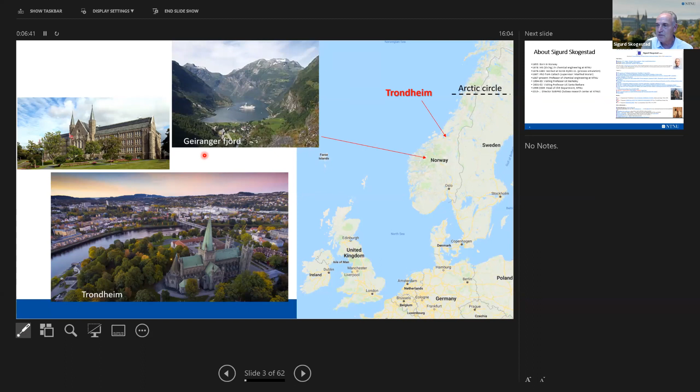Just a bit about myself. I mentioned I got my PhD in the US with Manfred Morari, early to mid 80s. Before that, I worked a bit in industry, but since then I've been in academia here in Trondheim at the university, NTNU. You can find more information about me on my homepage if you check it out - it's this old-fashioned homepage from the 1990s.

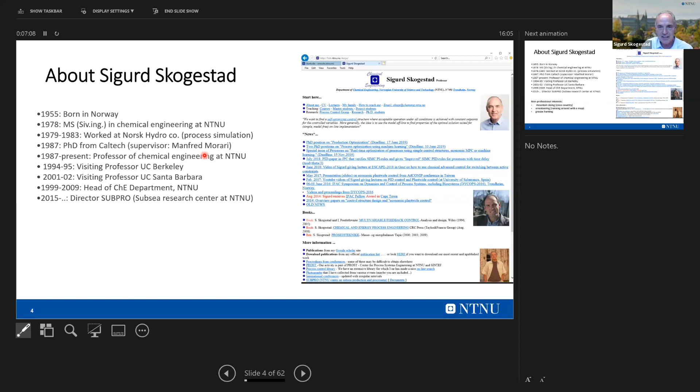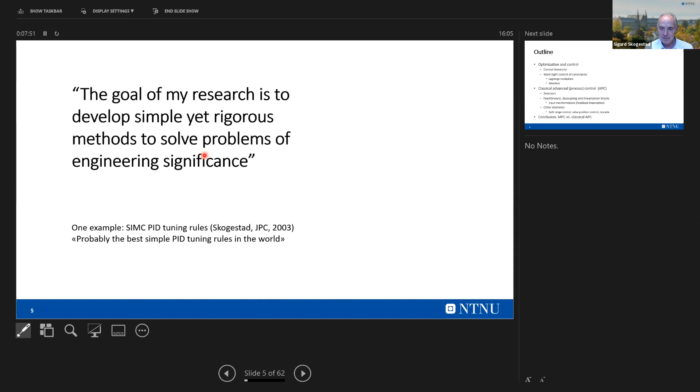My interest in terms of research is really to find things or develop tools that can help engineers do their job better. So that's always been my interest - I want to make something that's rigorous, but also useful. One example is the PID tuning rules I published back in 2003, which I called 'probably the best simple PID tuning rules in the world.' Actually I tried to give the paper this title, but it was not accepted by the journal, so anyway, this is like a subtitle. That's one example of something I liked working on.

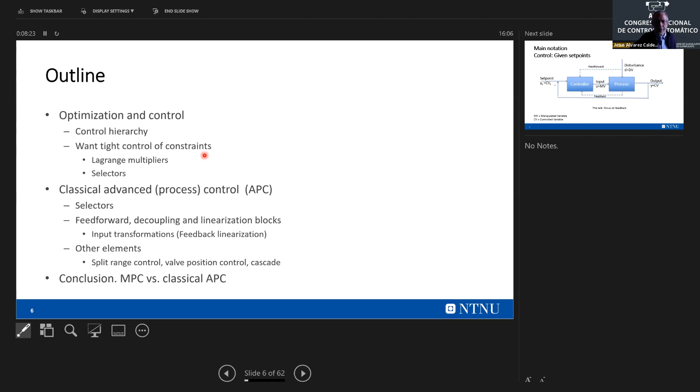But today I will talk more about optimization and how that links to control. I will start by talking a bit about how we do control hierarchies, and then I will talk in more detail about classical advanced process control using selectors, input transformations, split range control, and things like this. At the end, I will discuss a bit of MPC versus classical advanced process control.

This slide is just to give you some of the notation. When I talk about control, we're talking about the problem where you have a given set point. In optimization, you just have a cost function to minimize, which could be economic. But in control, the cost function is related to keeping the controlled variable, CV, the output Y, close to a given set point or reference. And for this, you use the inputs, the manipulated variables.

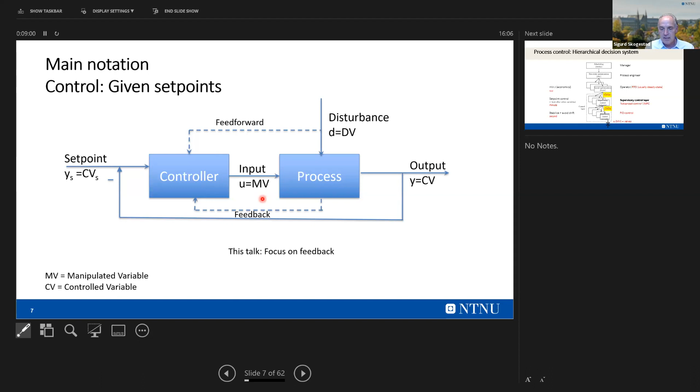But if you look at how a real system is controlled, it's not in a simple fashion like this. This shows a typical control hierarchy in a chemical plant. Here you can see 5 different layers, and each layer is also subdivided into different boxes representing different parts of the system. The main basis for this division is timescale separation. At the bottom you have the stabilizing layer, above that the advanced control layer on a minute basis, and then economics typically on an hourly basis. This is usually steady state in chemical plants. So this shows you how the real system looks with the different decision layers.

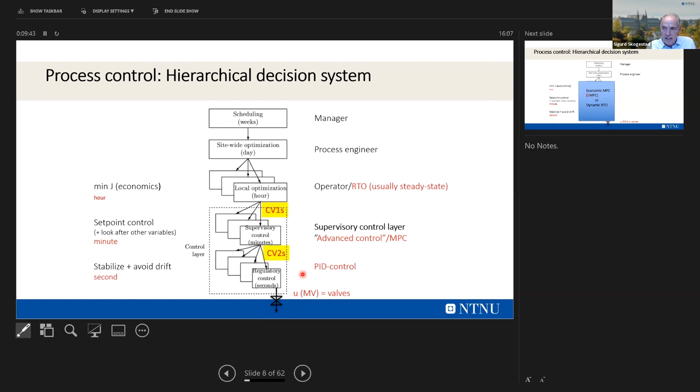Now, if you look at how people in academia are working, they're trying to replace all of these layers at the bottom, the two control layers, and optimization, by what is now popular to call economic MPC. The E stands for economic. In this talk, I will be talking about MPC, but that's going to be the normal MPC just on set points. This economic MPC is of course going to be the optimal way of doing things. The problem is that it's very difficult to make it work in practice on a big problem because it needs models and tuning and so on.

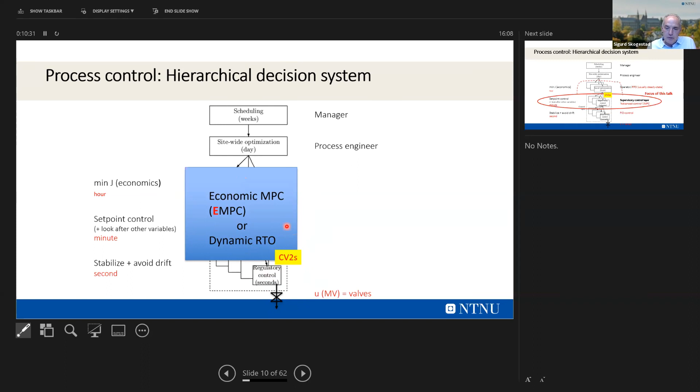You can try to keep some of the control layer at the bottom and replace just the economic layer and the supervisor layer by this. But also this is difficult to do in practice, at least for a large problem. So for large real systems, we are back to this hierarchy that I showed. The focus of this talk will be on using this hierarchy, and especially on this upper control layer. So that's going to be the focus in the talk, and talking a little about how it links to the optimization.

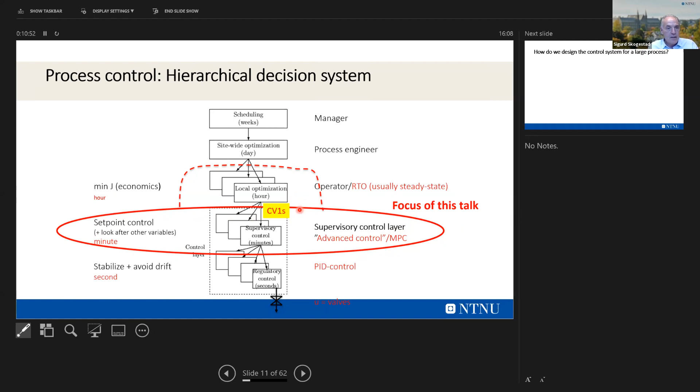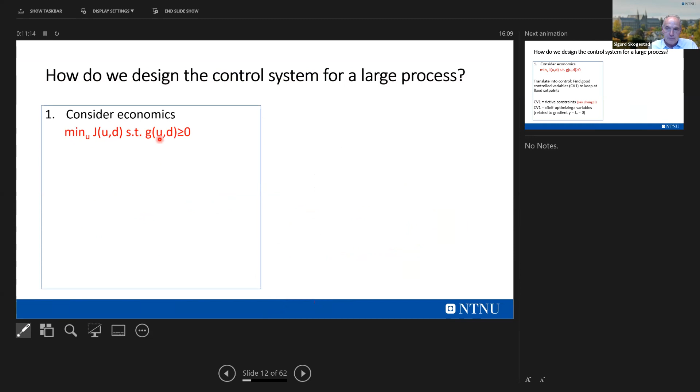So how do we design the control system for such a large process? There's many ways of doing it, but the way I recommend is first to consider the economics. You look at the optimal way of operating the system, usually just from a steady state, by minimizing a cost subject to constraints. Then you want to translate it into control, finding good control variables to keep at constant set points. The first thing you should always control is the active constraints. For the remaining degrees of freedom, you want to control something related to the cost gradient, which I also call self-optimizing variables.

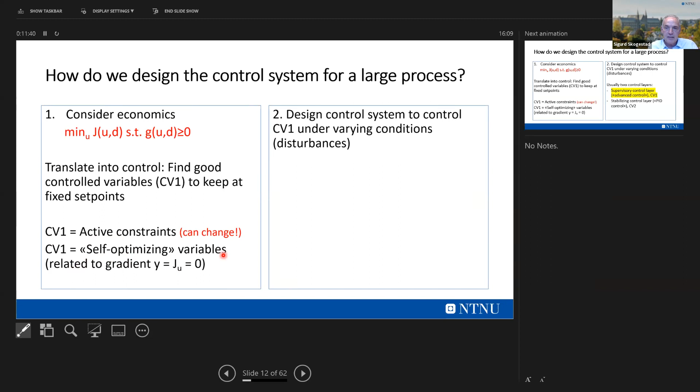Now, when you have selected these, then you need to design a control system to do this. That will then usually consist of two layers: one is this supervisory control, or advanced control layer, and then below there's this stabilizing layer. So in this talk, I'm focusing on this advanced control layer.

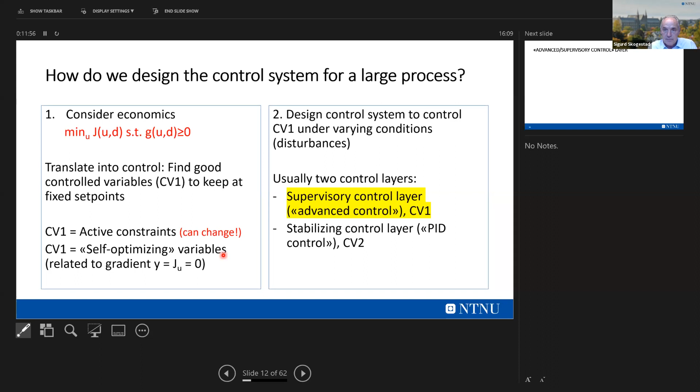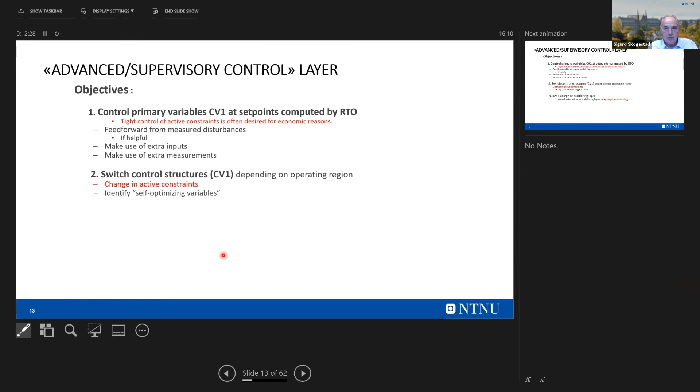So what are the objectives of this upper control layer? There are 3 main objectives. The first is, of course, to control these primary variables, CV1, the economic variables, at constant set points. It's important, especially, to have tight control of the constraints to avoid backoff and economic loss. The second thing is to do switching, because it happens quite frequently that these control variables change because of disturbances, and then you need to do switching of the control system. Also important is to keep an eye on the control layer below, the stabilizing layer. You must avoid saturation in that layer, because that can make serious problems, and this might also require switching. So you can see there's a lot of switching going on here that we need to look into.

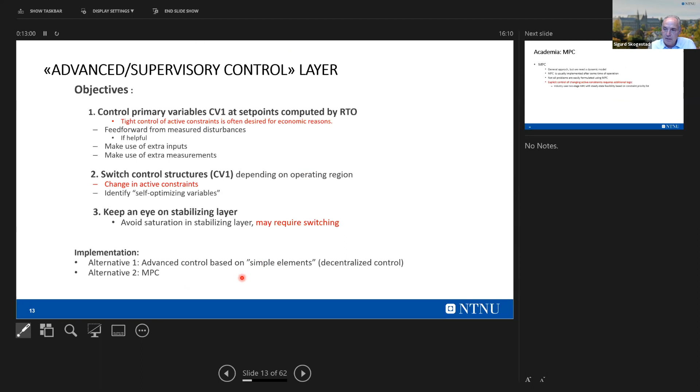There's 2 alternatives here, as I mentioned: the classical advanced control, based on PID controllers and simple things, and then model predictive control. In academia, the focus is on model predictive control. It's a general approach, but of course we need a dynamic model for the whole system. Another thing is that MPC is usually implemented only after there has been operation for some time, so we need to have something in the meantime.

Not all problems are easily formulated using MPC. Also, you should note that even with MPC, you need additional logic to do changes in active constraints. So if you look at how industry implements MPC, they have a two-stage approach where they first do a feasibility analysis, and then decide on what to control based on the constraint priority list. After that, they solve the MPC problem.

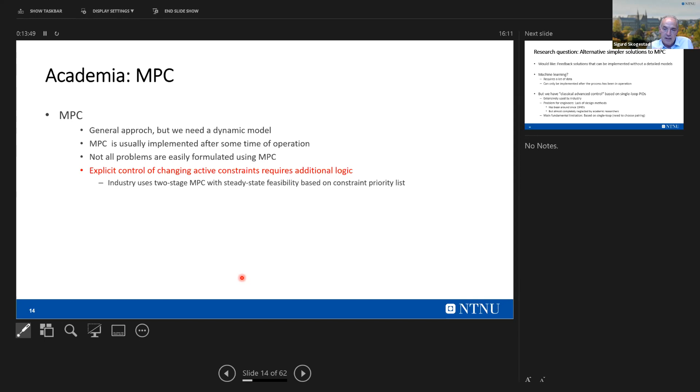Anyway, what I would like to discuss today is some alternatives to this, to find simpler solutions that require less information about the model. One topic these days, of course, is machine learning. Machine learning in theory could be used, but it requires a lot of data, and this can usually only be implemented after a process has been in operation. But then we have all these classical advanced control methods that require much less modeling, and they're still extensively used by industry. So I think it's time to look more into these methods again in detail.

The problem for the user and for the engineers is that there's a lack of design methods. Although it has been around since the 1940s, there's still not much methods you find in textbooks on how to do this. There's also some fundamental limitation, which is mainly that it's based on using single loop pairings, and this might not always work.

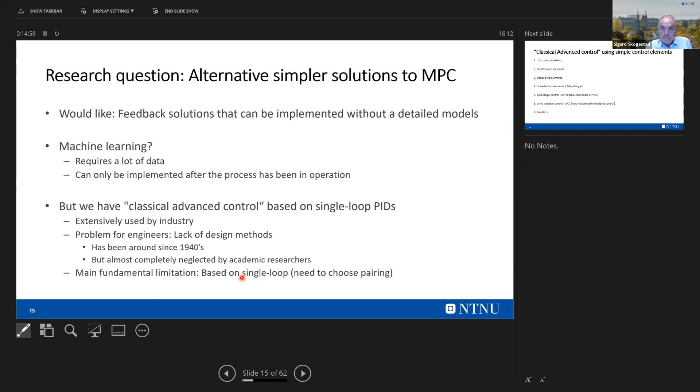Okay, so what is this classical advanced control I talked about, using simple control elements? Here I list 7 of these control elements that you can be using: cascade control, feedforward, decoupling, adaptive gain, split range control, valve position control, selectors.

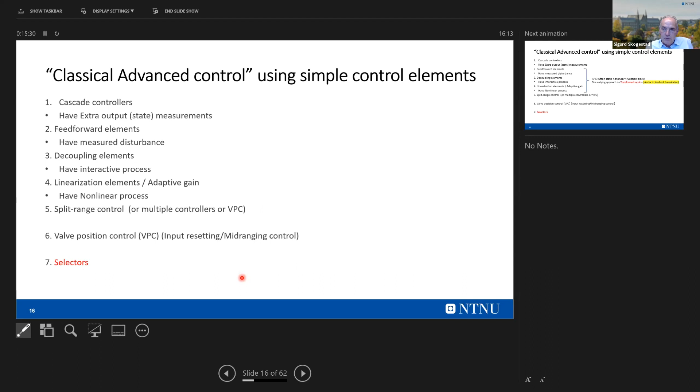And we know fairly well when these should be used. Cascade control, of course, you use if you have some extra measurement, maybe without a delay. Feedforward control and decoupling, we know that these three can often be combined into what is often called function blocks in industry—they're just static things. I'll be talking a bit about this today, looking into the unifying approach of what I call transformed inputs, which turns out to be related to feedback linearization.

Then there's split range control, which you use when you have extra inputs. Valve position control also, if you have extra inputs, but dynamically. And selectors—selector is going to be one of the main, really the main topic today. Selectors are used when you have changes in active constraints or when you need to switch between different controlled variables, different outputs—so when you have one input, for example, and many outputs.

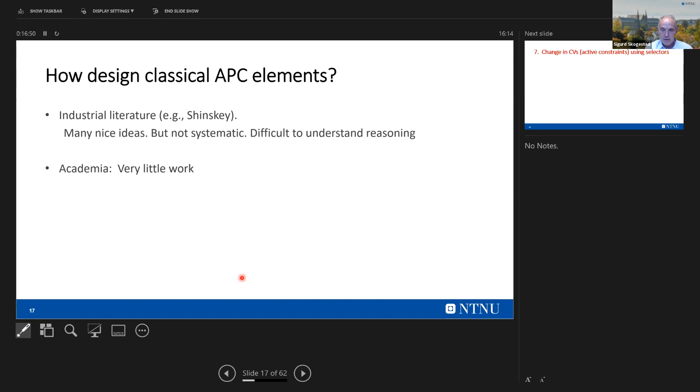So how do we design these classical APC elements? Well, it's not easy. There's an industrial literature going back to Shinskey with a lot of nice ideas, but it's not really systematic, and it's difficult to understand the reasoning in many cases. If you look at academia, there's actually very little work—some mention of these methods in textbooks, but that's almost all you can find. There's very little systematic work there. So this has been one of my interests, to try to improve on this situation.

So looking into this last issue of selectors—that's going to be an important part here. I wanted to show you that selectors aren't just something engineers do because they couldn't find anything else. Selectors have some basis in the original optimization problem you're trying to solve. This is an optimization problem that you typically want to solve at steady state.

This is the steady state problem: minimize the cost subject to constraints. And very typically you find that the optimal solution is that all the degrees of freedom, or at least many of them, are used to satisfy active constraints. If you look at it in terms of the cost, you'll find that to minimize the cost, it's important to control these active constraints tightly. This is to minimize what we call the backoff, because if you have a distance to the constraint, it generally gives you an economic loss.

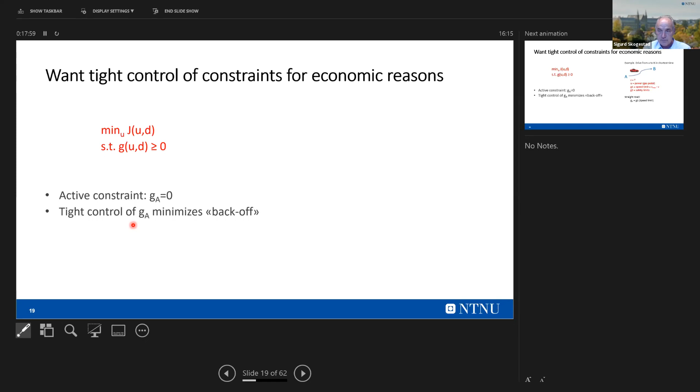So I'll give you an example of active constraint control. You just want to drive a car from A to B in the shortest time. The cost function here is the time you want to minimize. The input is the power, the gas pedal. There are some constraints—one is the speed limit, another is some safety limit to keep the car on the road, and so on. But in the case of a straight road, most likely the active constraint will be the speed limit. So if you have feedback control that keeps you at the speed limit tightly, you will be optimal—you don't actually need any optimization for this.

So the question is: how can we identify and control active constraints in an efficient manner? If we can do this, we can probably optimize the operation without actually having an optimization problem being solved.

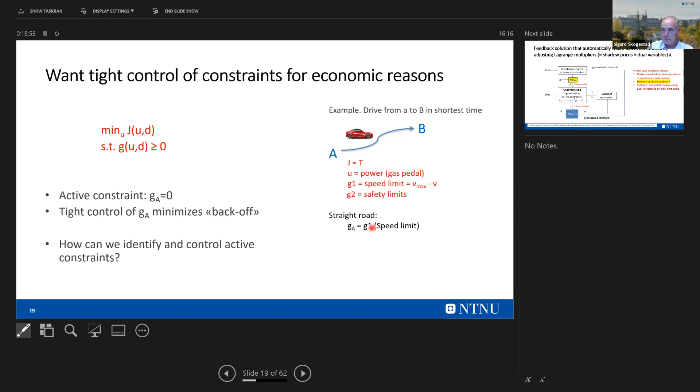To understand this a bit, you can look at constrained optimization. If you know something about constrained optimization, you know you can introduce what we call Lagrange multipliers, or the dual variables, shadow prices. One way of decomposing the problem is illustrated here—this is sometimes called dual decomposition. In this case, you guess the shadow prices, the Lagrange multipliers, then solve an unconstrained optimization problem, and then you iterate. Now the iteration can actually be done by controllers. Here I'm using just PI controllers to control the constraints, and each controller adjusts the Lagrange multiplier.

Those Lagrange multipliers go into these problems, where you can also solve by PI controllers and computing what the real inputs to the process are. So this can actually be found to be optimal.

Note here that there is a selector, because the Lagrange multipliers have to be greater or equal to 0. So when they're 0, the constraint is not active, and when they're non-zero, the constraint is active. So there is a selector here.

But one problem with this way of doing it, this is actually a general way of doing it. It could be used for almost any problem. And this is actually a PI solution to an optimization problem.

But you note that the constraint control using the dual variables is on a slow timescale, because you need a timescale separation here. So this will not be able to do tight control over the constraints.

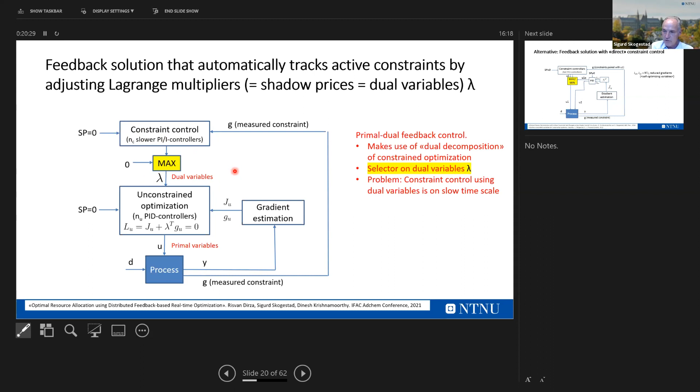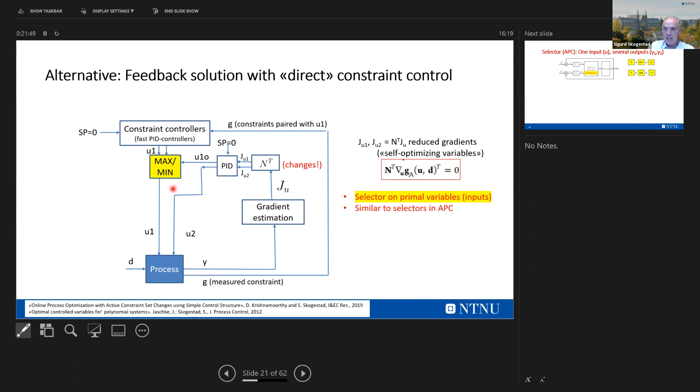Sometimes I call it override, but I don't really like this word, because it's not necessarily an override. It could just be the optimal thing to do.

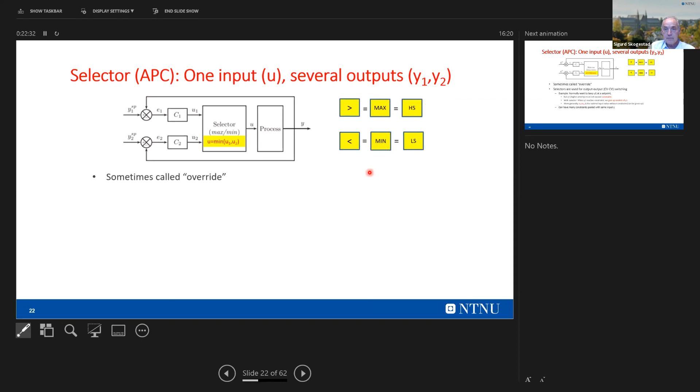And selectors, I use for output-output or CV-CV switching. So just a typical example, you want to keep Y1 at the set point. But this set point can be given up.

So if this variable reaches its constraint, this selector will say, this means that input U2 will be selected, and it will no longer be controlling Y1. And you can have many constraints being connected to the same selector.

And so you can see that there's one controller for each thing being controlled, and then you select on the inputs. So selectors work well, but they require pairing each constraint with a given input, which is not always possible.

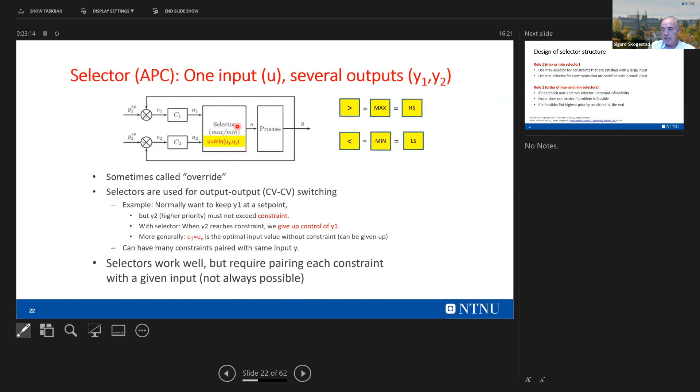But a bit about designing of selectors. When we looked into this, I found out I couldn't find any design rules for selectors. So we actually wrote a paper very recently on this with Dinesh.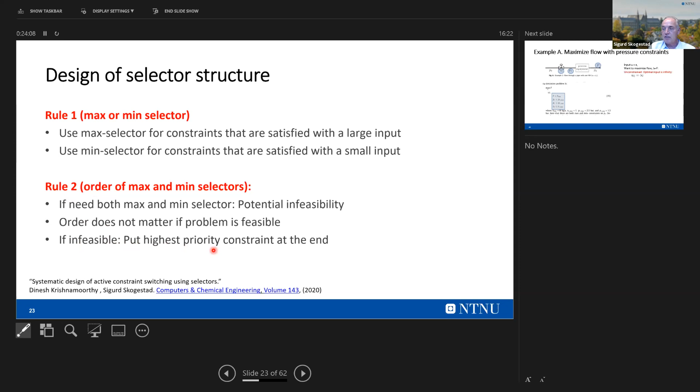So I'll show you an example of how this works. So here is a typical problem. We want a constraint problem. We have a valve here, and we have some pressures and some equipment. We want to maximize this flow, but it also has a maximum limit.

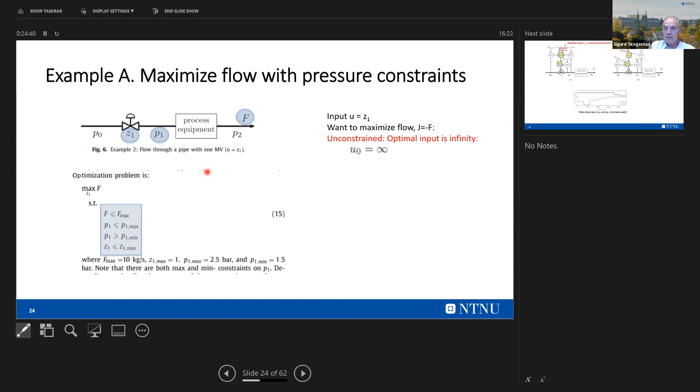There are limitations on the max and min pressure here, and a maximum opening for the valve. So how can I make a control system to maximize the flow here? This problem will always be at active constraints, and it turns out you can do it this way. You need two selectors because you have both a max and min constraint on the pressure, so obviously you need two selectors. Then there's also this flow constraint, which goes into the min selector.

But you have two alternatives: you can have the min selector first and then the max, or the other way. As long as everything is feasible, there's no difference between the two. But if there's infeasibility, it will always put priority on the last one. So in this one, we have the low constraint on pressure into the last block, and in this one we have the max constraint on flow into the last block. That's the difference: this one will always satisfy the pressure constraint, and this will always satisfy the Fmax constraint.

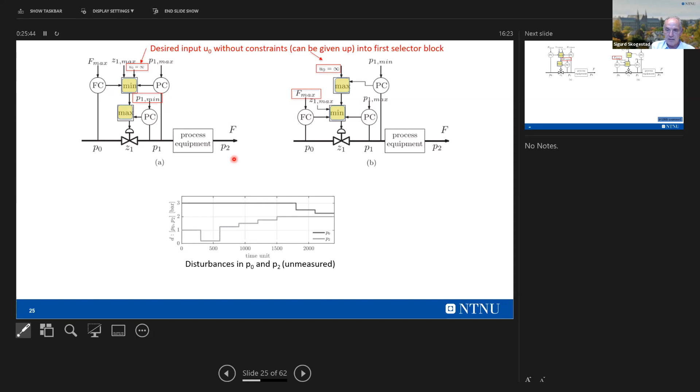Here I show some disturbances on P0 and P2 that I'm simulating. I will simulate these two structures, and here are the responses. You see they are identical, except for this case where it's not possible to satisfy both at the same time. For this structure, it will always satisfy the constraint on pressure but violate the constraint on F. And this one will always satisfy the constraint on flow because it's in the last block, but it violates the constraint on pressure.

So this is a simple way of designing a control system that makes you do exactly what you want in a very simple manner.

This example is always on constraints. Here we're on the max flow constraint, this region is on the pressure constraint, P1 max, and the last period is on the fully open valve constraint. So this is always at constraints, meaning you don't actually need to solve an optimization problem to make this optimal. You just need to implement this simple selector structure.

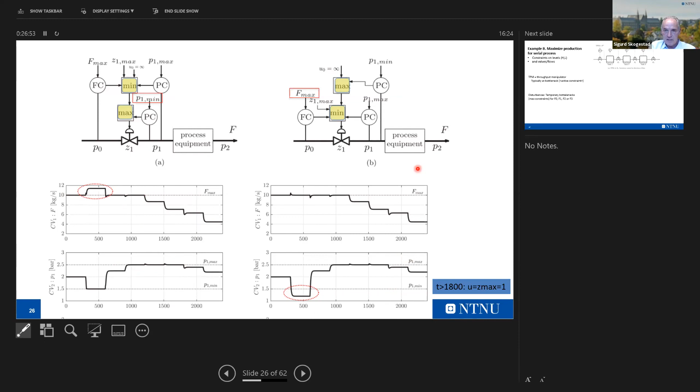I showed you that this can also be designed in a systematic way, as I just showed with the last two rules. Now let me give you another example, which I think is quite interesting. This is very common in chemical plants, that you have a series of units, and you need to keep production flowing through the system.

This is called inventory control. In this case you have the feed rate given, and then you need inventory control in the direction of flow. So when you have more feed, this level goes up, and then this flow will increase, and so on. In some cases you can put the throughput manipulator, where you decide the feed, in the middle of the process.

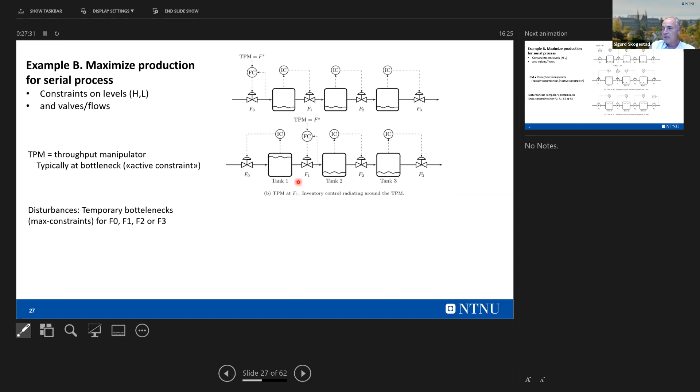Then you need what we call a radiating control structure, so the loops are in the direction of flow this way, and this loop needs to be arranged the other way. You can also have the case where you have fixed product flow, and then all the loops are rearranged in this direction, in the reverse flow.

So this is something you would like to look like, and as you move around the TPM, which could happen because of disturbances, you need to change the whole control structure. Also note I put low levels here and high levels there, and that's actually beneficial, because when this flow rate is given, if a temporary disturbance happens and this flow goes down, I can keep production going by filling up these levels. The opposite here: if you want to keep this production going and you have a temporary reduction in this flow, you can just empty these tanks, or keep emptying them, and keep production going.

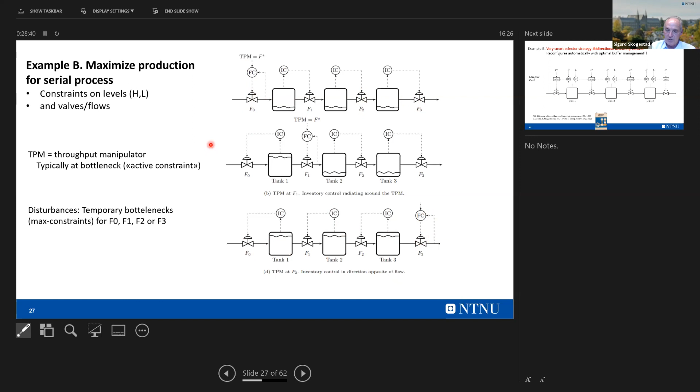So you would like to make some logic that always gives you this situation, and it turns out you can do that by using selectors. This is a very smart selector strategy that gives you exactly all the structures on the previous slide by using selectors — bidirectional inventory control. It reconfigures automatically with optimal buffer management.

So for each part of the process or inventory, you have a high set point and a low set point. The high set point goes to the flow before, and the low set point goes to the flow after the inventory. Then you need the minimum selector to decide which one to use.

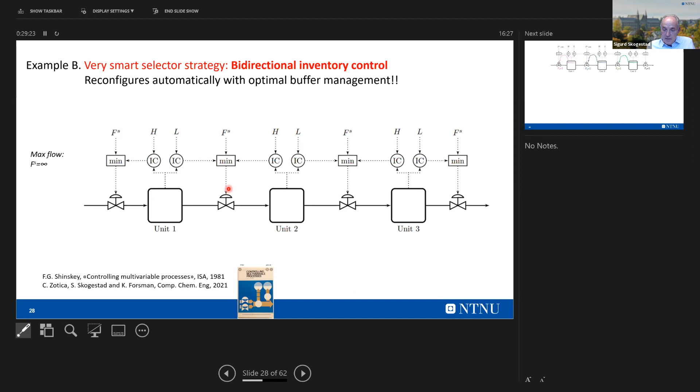And this also follows the rules that I was presenting before, and I'll show you how it works. So this is a case where we're starting from a situation where we are producing a given amount. We want to have a given flow rate of 1. So then this is given, and the inventory control loops will be going in this direction, keeping all the flows at 1 in this case.

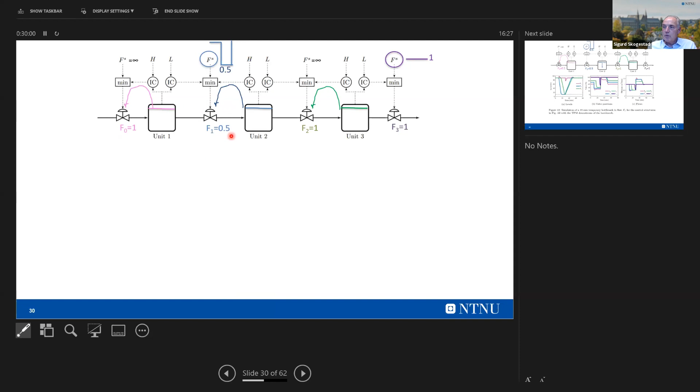Now imagine there is a temporary disturbance in this location, so for some reason this drops to 0.5. Maybe something here has been taken out of service or something. But we would like to keep production going, and I'll show you now, this selector structure will do this for you automatically.

So when this goes to 0.5, we'll break. This loop is no longer being controlled, or this level is not being controlled. It will start dropping because this is low. It will eventually drop to the low level. When it drops to the low level, then this loop will take over, and this will now be not controlled anymore, and this will start dropping. And eventually, then this will drop to the low.

And you see now that you are able to keep, only after some time, you really need to start reducing this one. You can keep this flow going for quite some time, as you can see in the simulation. This shows the levels here. This is the valve openings, and this is the flow rates. So you can see that you can keep this green, this purple flow here going for a long time. Eventually, it needs to be reduced.

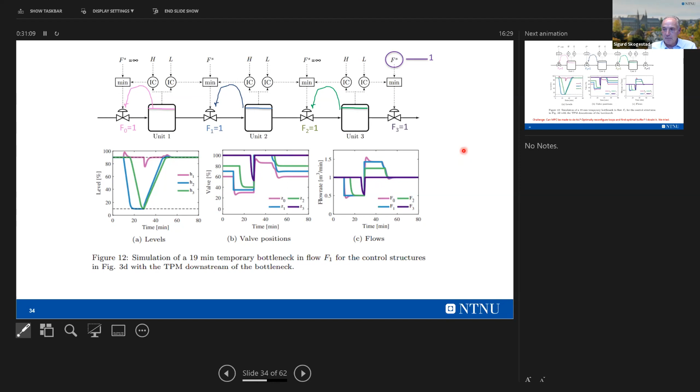And then at this point, this disturbance goes away, and it will rearrange itself back to the original structure, and it will refill all the levels by opening the valves, and it will go back to the original again. So it's almost like magic, you know, and it's a very simple control structure.

And you can say, well, maybe you can use MPC here. Well, I think I would like to challenge you to design an MPC that does this. I think it's not easy because we have been trying. I think it certainly will be much more complicated, and it's even not clear that you can do it in a simple way. But this simple selector structure, which actually is just tracking the active constraints, is able to do it.

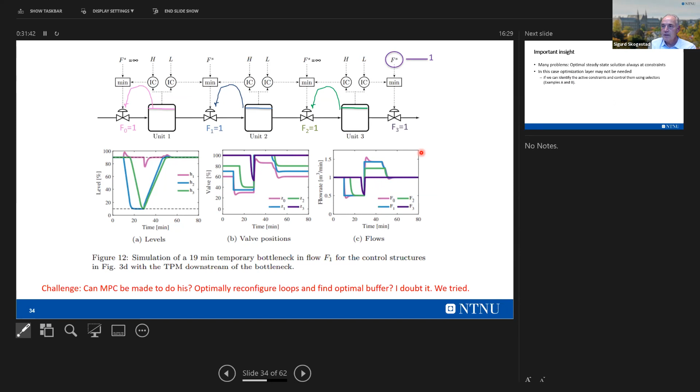So an important insight here is that for many problems, the optimal steady state solution is always at a constraint. And in this case, an optimization layer may not be needed if you, just by measurements, as we did in the previous example, can identify the constraints and then switch using selectors.

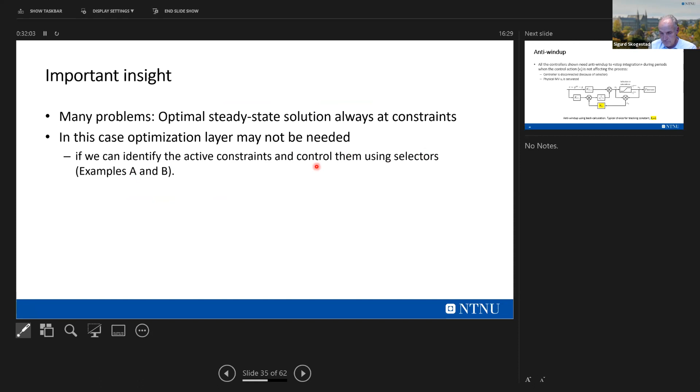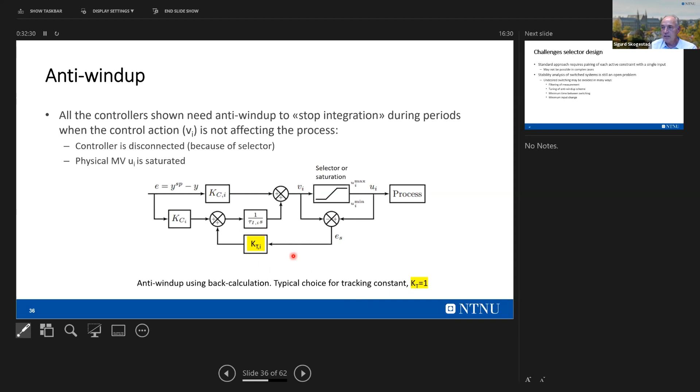Let me just mention, of course, that for all the controllers that I was showing you here, we will need to have some anti-windup scheme implemented, as we have integral action in the controllers. So usually I recommend using this back calculation scheme, where typically this tracking constant is just set equal to 1, but the tracking time is the same as the integral time. So this is what was shown in the simulations.

Okay, so what about these challenges for selector design? Well, first of all, it's not so obvious how to design these selectors, although I think with some insight or some rules you can be helped. But there are some problems, and that's also that it requires you to be able to pair each potential constraint with one input, and this might not always be possible, because there might be regions where this will not work.

Another thing is that, of course, the stability analysis of switched systems is still an open problem. You can have high frequency switching occurring. You can have different problems, even chaos. So maybe that's one reason why people in theory have been staying away from these problems. They're not easy to solve mathematically and analyze.

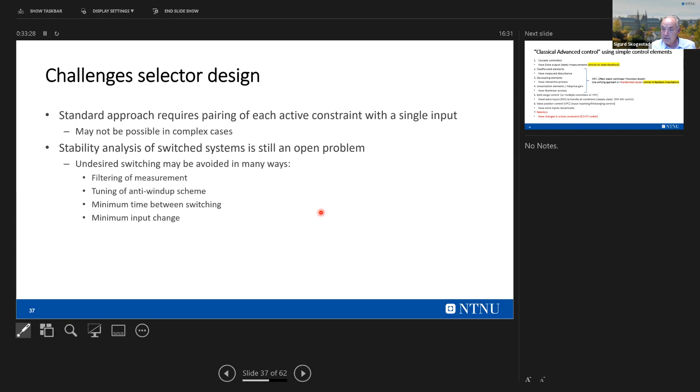So that's selector design. Let me go a bit back to this list again. So far, I've only talked about the last of these simple elements, and there are still 6 more left here. I'd like to go just quickly through them very briefly, and then, well, you can ask some more at the end if you want to know more about them.

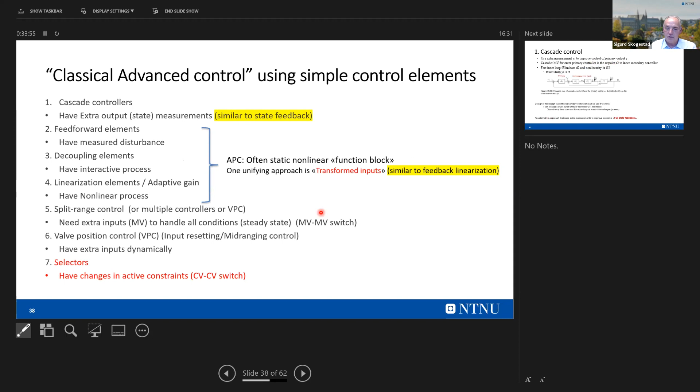So a related approach, of course, that's used in optimal control is full state feedback, when you also use additional measurements, but this is an alternative approach, you can say.

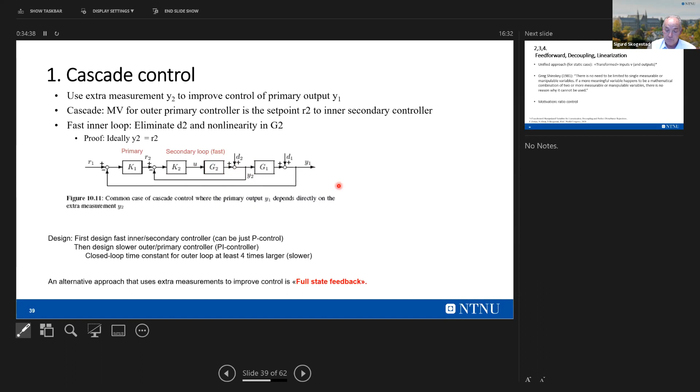Then regarding this feed-forward decoupling linearization. In many cases in process industry, these are done using just static calculations.

And I will just want to show you that you can use what I call transformed inputs for this as a unifying approach. This is also a bit related to something Shinskey talks about.

There's no need to be limited to single measurable or manipulable variables, he says. If a more meaningful variable happens to be a mathematical combination of two or more measurable or manipulable variables, there's no reason why it cannot be used.

So that's something that's used quite a lot in industry. But again, the problem with using it in industry is that there's no really methods for how to make use of it. But let me give you a motivation on ratio control.

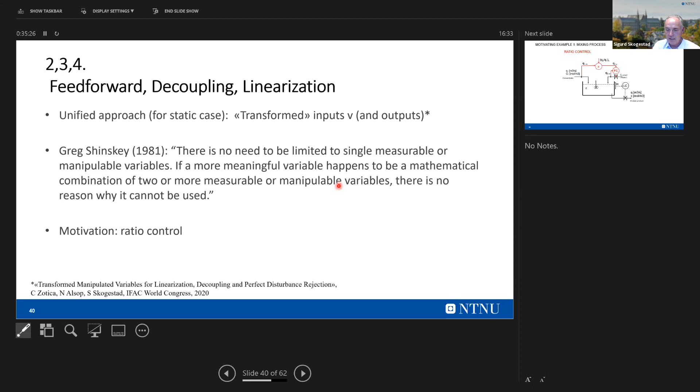So ratio control is very common in process industry. It's used always when you mix flows. So here we're mixing like a concentrate Coca-Cola with water, and want to make some lemonade here, for example. So we will typically here use ratio control, where this is the input, the MV, and this is the disturbance flow.

Now, this ratio setpoint generally needs to be set by some outer controller, which takes into account other disturbances and uncertainty. So this is a very common way of doing it.

Now, here we use the transformed input, you can say, is the ratio between these two flows. But keeping this ratio constant does not handle disturbance in C1 and C2. Also, there might be nonlinearity in the loop that controls this ratio. So is there another approach that we could use instead?

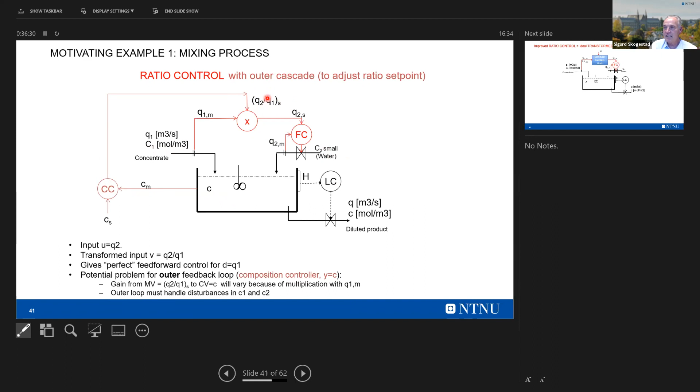Yes, we can use this idea of transformed inputs. So we can make some nonlinear function block. The V is some transformed input variable, which will be set by the outer controller. The outer controller is there just to correct for uncertainty and model mismatch and unmeasured disturbances.

So how can we design this V variable? Well, it's very simple. You write down the equation, the steady state model for the thing you want to control. This is just, in this case, a static mass balance. And then you define the transformed input just as the right-hand side of this equation.

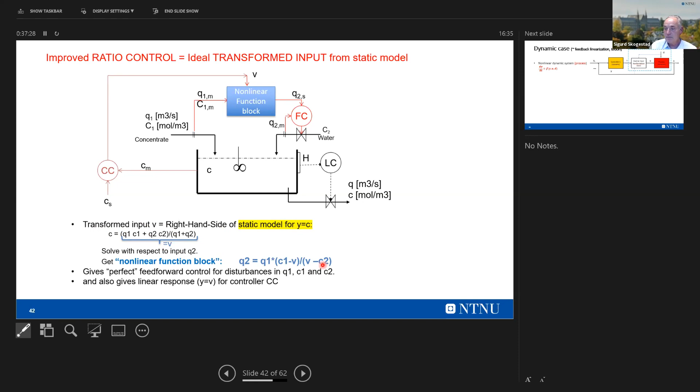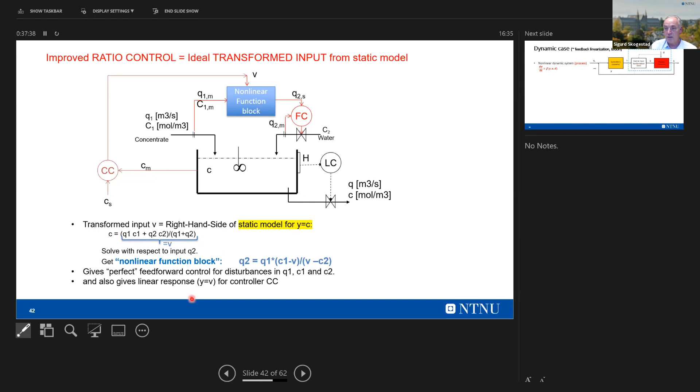And then you get the transformed system is just y equal to v. So to implement this, you need to solve this equation with respect to the input, so that this nonlinear function block will be the solution of this equation with respect to Q2. So it'll be this expression. And this gives you a perfect feed-forward control for disturbances in Q1, so C1 and C2, and also gives a linear response for the controller, the outer controller. So it's almost like some magic here.

And actually, this is very closely related, if you look at the dynamic case, to the feedback linearization idea of Isidori and so on. So if you have a nonlinear dynamic system shown here, then you can introduce the transformed input again as being the right-hand side, but minus A times y, where A is the tuning parameter.

Now, Isidori usually chooses A equal to 0, but that's not a good choice because that gives you an integrating transformed system. But with the A parameter, this becomes just a first order transformed system, which is linear, decoupled, and it's also, if A is diagonal, independent of disturbances.

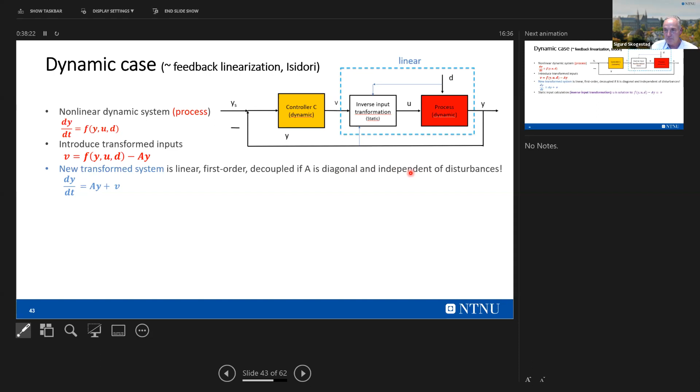So it's again almost like magic. And to implement this, you just need to solve this equation here with respect to the physical input U. So that can be solved numerically or analytically. And the value of V, which is the transformed input, is set by the outer controller, which could be a PI controller. So ideally, we don't need to change this V variable, but generally we need this outer controller to correct for uncertainty.

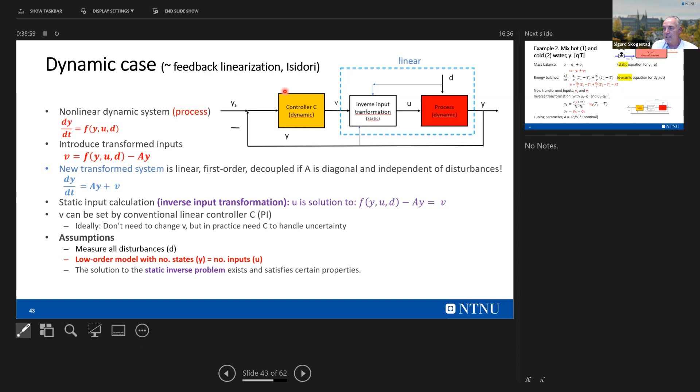And this has some limitation, this approach, of course, but it can be applied to actually many real processes.

Just to give you a simple example, just look at the mixing of hot and cold water. So it's like, again, a mixing process. Two MVs here, both the two flows in, hot and cold water. And I want to control the total flow, and I want to control the temperature. So I write down the mass balance, which in this case is assumed to be just static. And so the first transformed variable is just the right-hand side, so it's going to be Q1 plus Q2.

Transformed input, and the second transformed input is going to be the right-hand side of the energy balance equation, which is dynamic, minus this A times T, where A is a tuning parameter. And we're going to choose A, in this case, just equal to the nominal residence time,

Or the inverse of that. So we have two transformed inputs, V0 and V, and we can then, to implement this, we need from a given value of V and V0, to find the U, and that's just done by solving these two equations with respect to Q1 and Q2. So that's this, and this again works like magic.

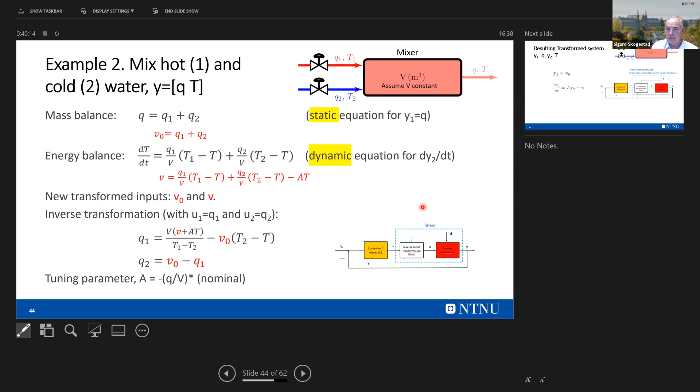It makes a transformed system that's linear, decoupled, and independent of disturbances. So this is the resulting transformed system, as I said, linear, decoupled, independent of disturbances.

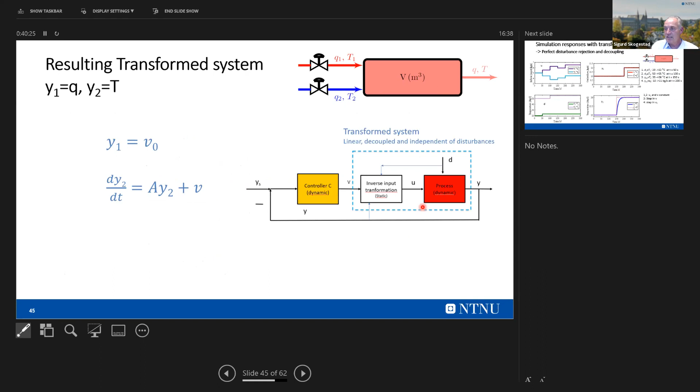And if you do some simulations here, just to show you that it works in practice, I'll show you some disturbance in T1, disturbance in T2, and set point change in the temperature, set point change in the flow. And you see that this is the flow following perfectly the set point. This is the temperature. It follows this set point by this first order response, and the speed there is given by this A parameter.

And then you see there's no effect of disturbance here. That's taken care of by this transformation, this feed forward action. So it's almost like magic, but of course this depends on you having a perfect model, and that you measure disturbances. But also in practice, when this is not the case, you can get large benefits from using something like this. So this is something we have been working on recently.

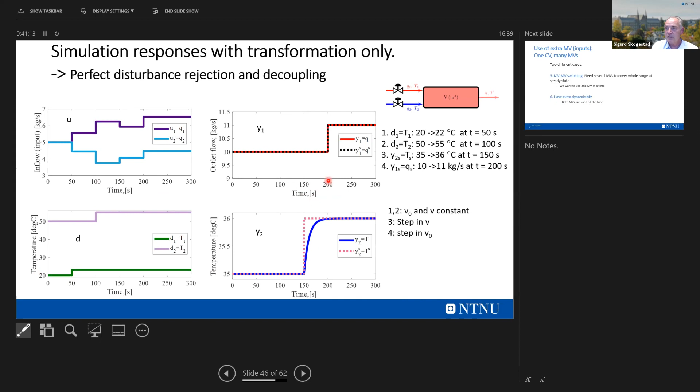Then another case here we haven't considered yet, number 5 and 6 on my list, that's when we have extra MVs. So there's two cases: either use the extra MVs for steady state, or just dynamically.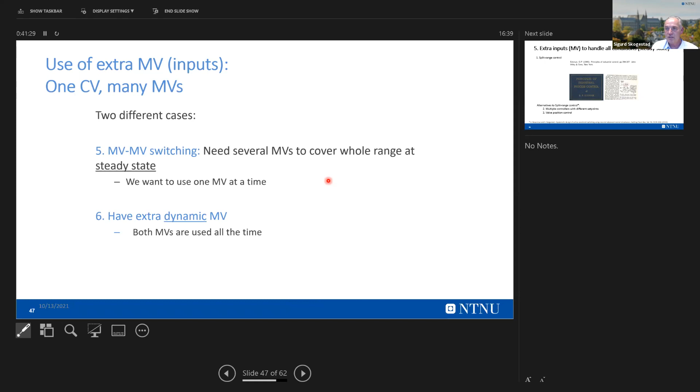So if you need extra MVs to handle all the conditions, then you can use something called split range control. It goes back a long time, to like Eckman 1945. Alternative approaches use multiple controllers with different set points, or valve position control. So I'll show you just how this works on a simple example.

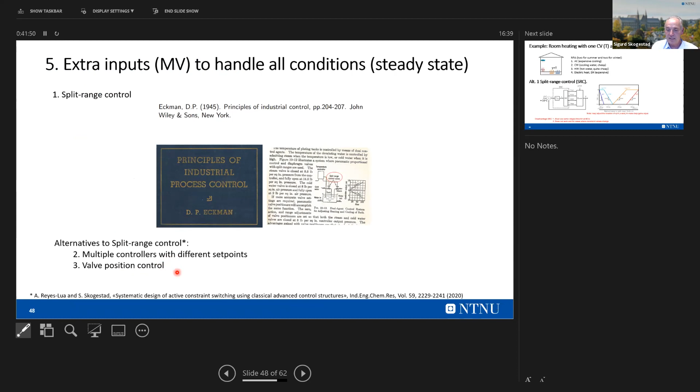So assume you want to control the temperature in the house, and you have 4 sources for doing the control. You have 2 for use in the summer and 2 for the winter. So when it's very hot, you can use air conditioning. If it's not quite so hot, you can use cooling water. If it's getting a bit cold in the winter, you can use hot water, and if it's getting really cold, you can use an electric heater. But you don't want to use these at the same time, you want to use one by one.

And to implement this, you can make this split range block that shows you the order of how you want to use the blocks. You can implement it very easily with just one controller that computes this internal variable V into this block, and this decides on how to use the different inputs. So you can get different gains there by adjusting the way you do the splits here. But you need to use the same integral time in all these loops, which can be a disadvantage here.

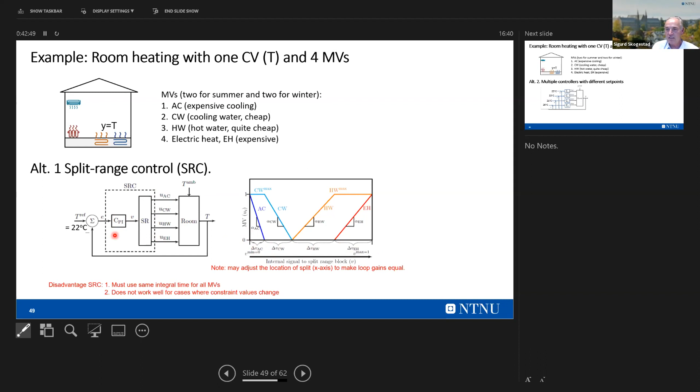So maybe a simpler choice in many cases is to use alternative 2, which is multiple controllers with different set points. So here I have 4 controllers, 1 for each input, and they're working with different set points, meaning that only one will be active at a time. So this also works really nice, and I think maybe it's often simpler than the other approach.

Well, the set points have to be different, but you could always make some outer cascade that puts them back to the desired set point. So this can be fixed up.

A third approach could be what I call input resetting. That's when you always use the same input for controlling temperature, like in this case, I'm just using the electric heat always for temperature. And the other controls are really just resetting the input back again to some desired value for the heat in the case where you are not really in the winter. So this is also an alternative scheme.

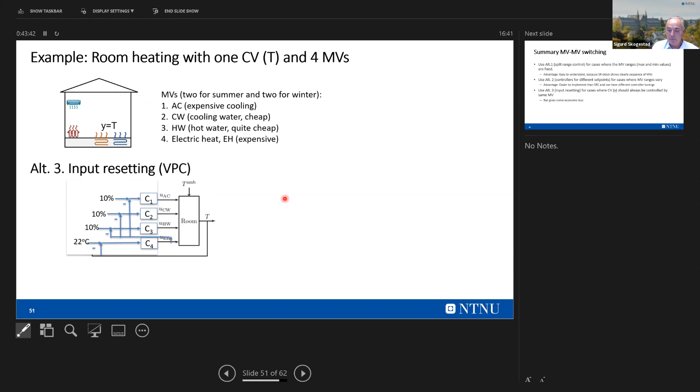And here I'm comparing the three. I would say that the traditional split range control is okay, fine when the MV ranges are fixed, and it's easy to understand. This thing with different set points, I think, is often better, especially for cases where the ranges vary for the MVs. And the third case generally gives you some economic loss, but it's nice if you always want the same MV to control the output.

Getting towards the end of my list here, we also have this case where we have extra inputs that you need dynamically. This will be the case of valve position control, which is active all the time with the aim of resetting or mid-ranging the input. Just to give you a simple example.

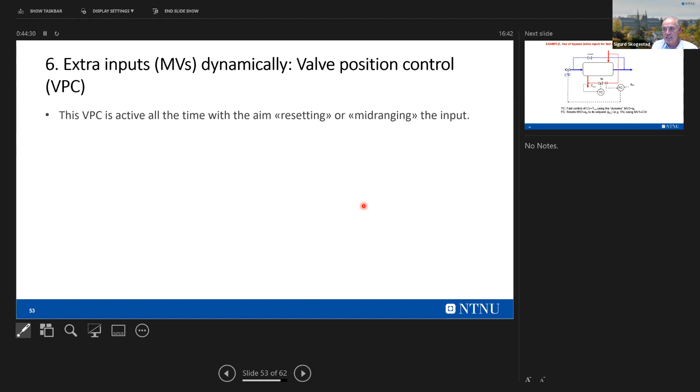Say you want to control this temperature in the heat exchanger - this is a hot stream outlet temperature using cooling water. Cooling water is your main input used for steady state, but for dynamic purposes you have added a bypass, which is not really optimal from an economic point of view. This bypass is used for fast control because it has a direct effect, but you don't want to use it, so you want to set it back to a small value, like 5% only.

And for this, you use this valve position controller, or input resetting controller, that sets this back to 5% by manipulating the other input, which is the cooling water. So this is also a nice solution that can be used when you have extra inputs dynamically.

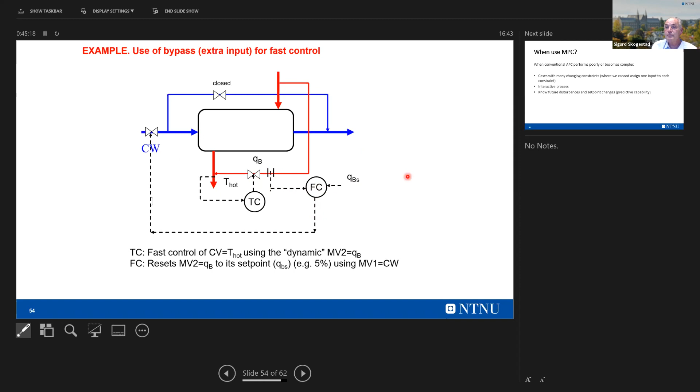Okay, so getting towards the end here. So what about MPC? Of course MPC has its merits, and there are cases where what I described to you just doesn't work, or it gets too complicated, and MPC should be used. MPC also has large benefits for some very interactive processes where dynamically you can especially be much better. And if you know future disturbances and set point changes, then you can use the predictive capability of MPC to do much better.

But in many cases, what you will see is that you can do equally well with these standard advanced control methods. And in some cases, you can solve problems which I don't even think you can do with MPC.

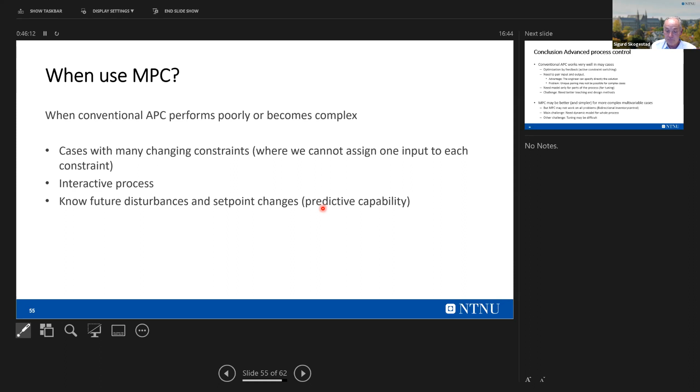So my conclusion is that a lot of these conventional advanced control methods work well in practice. Essentially, you're using optimization by feedback, by measuring active constraints and switching. You need to do the pairing of inputs and outputs because it's basically based on single loops. This can be nice because the engineer can specify directly the solution that you get, but the problem is that it might not always be possible for more complicated cases.

A nice thing is that you don't need the full model - you only need the model for the part of the system where you're doing the control. There's a challenge in terms of teaching and better design methods.

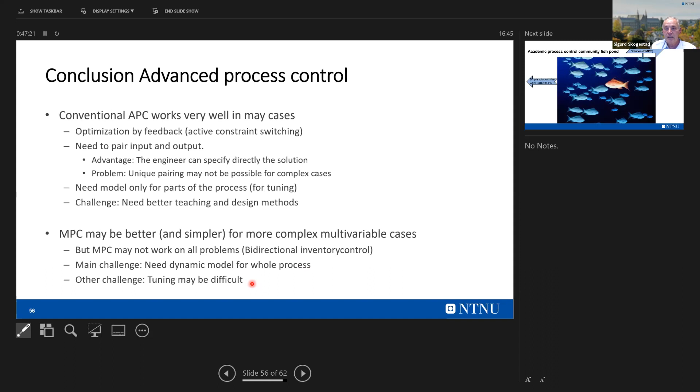And as I said already, MPC certainly may be the best solution for some problems, no doubt about that. But the main challenge, I think, is that you need a dynamic model for the whole process, and this is very expensive to get in many cases. Also, tuning may be difficult, and it does not work on all problems, I think.

I think this is an important problem to look at, and it has a lot of merits. I think this could be a challenge for the control community. So thank you very much for listening to me.